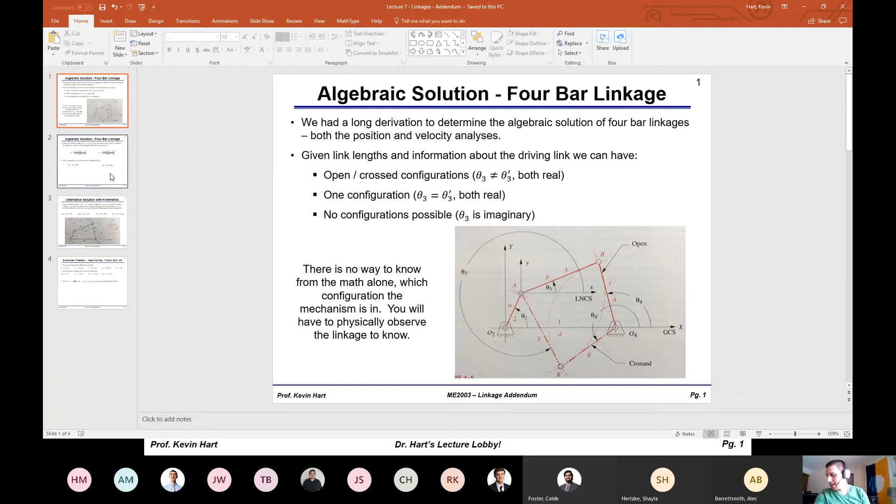Now, we looked at the algebraic solution, which we sort of went through and glossed over, and said that in the algebraic solution you could just come up with these expressions that are general for omega-3 and omega-4. Sorry guys, my dog is all up in my grill right now.

I think he just wants to go outside. It's beautiful out there. All right, so omega-3 and omega-4, there are your equations for them, and then you can get the velocities using this kinematic analysis.

Let's say you don't remember what those equations are. I don't have that memorized, I don't know what that is. Is it sine theta 4 minus theta 2, or theta 2 minus? I don't remember, okay?

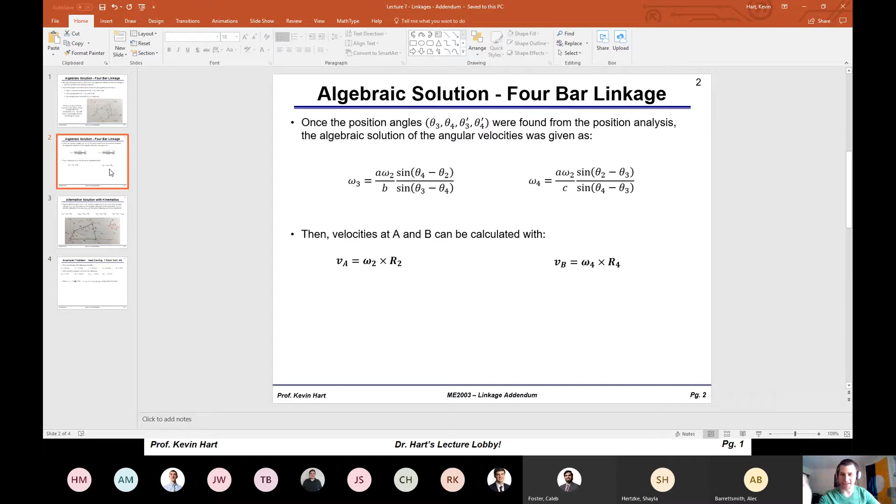Alternatively, you can just go back to your kinematics, which we talked about in weeks 2 and 3, to do an analysis on these linkages. In my opinion, it's probably easier that way, it's a little easier to understand, and it's more XY coordinate system friendly, so on and so forth.

So that's what we're going to do today. Remember, we have these general relationships between velocities of these particular pins in the system, angular velocities of the individual links, and then the position vectors that locate all of those pins. These 4 equations are all you really need to do the kinematics analysis of the linkage.

That is the velocity kinematics analysis. So VA, velocity of B with respect to A, velocity of B, and this relative velocity relationship, which you should have learned in 2002, hopefully it's stuck in your brain, is that the velocity of B is velocity of A plus velocity of B relative to A.

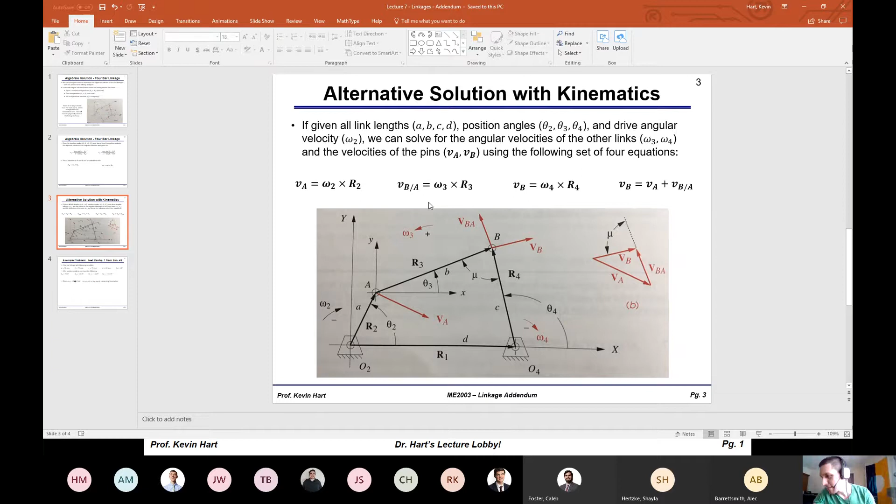All right, let's do a practice problem using kinematic analysis of one of the test configurations from simulation number 3, so that we have some verifiable numbers. Test configuration number 1 of simulation number 3 had these particular values, and we're going to go through the kinematic solution with these values just to hammer home that kinematics knowledge that should be buried in that brain.

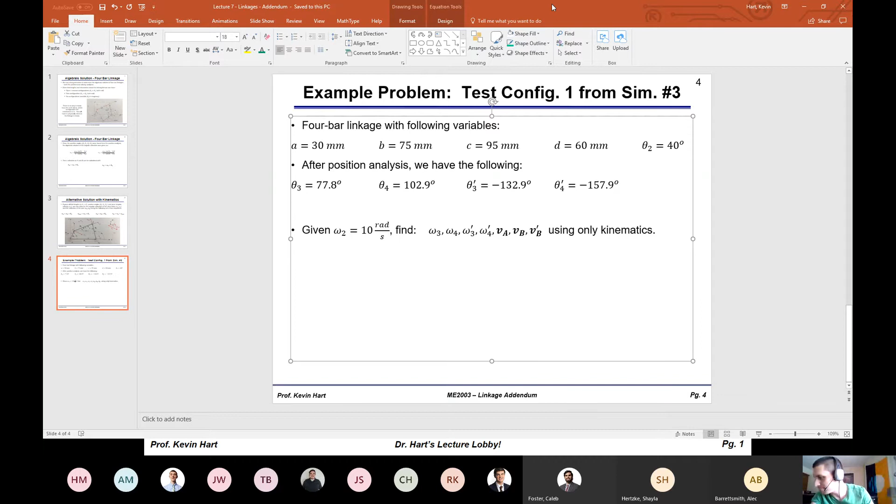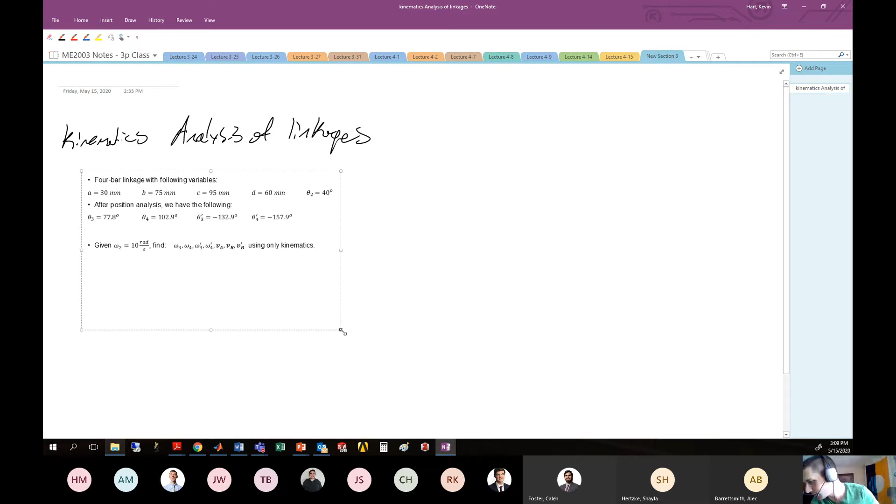So I'm going to copy this information over to the writing pad, and I'm going to bring the model in, and we're going to do it. Here's your information. And let's look at your model, which will be helpful for us in this problem.

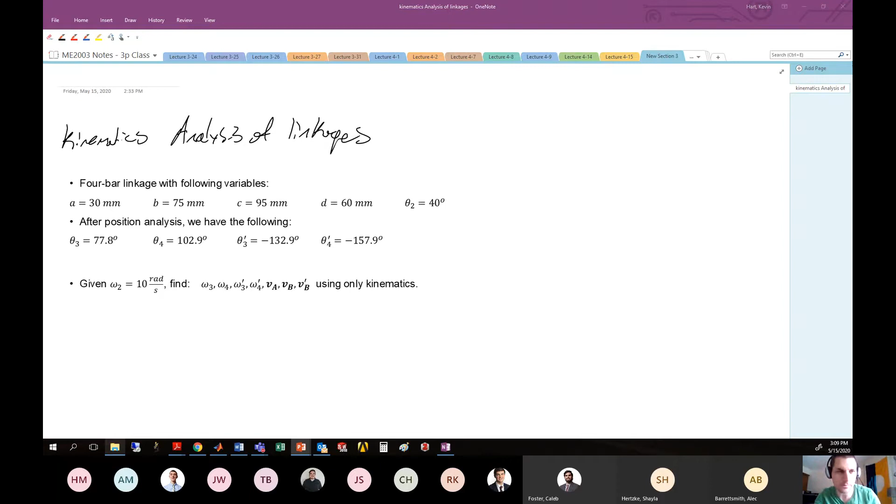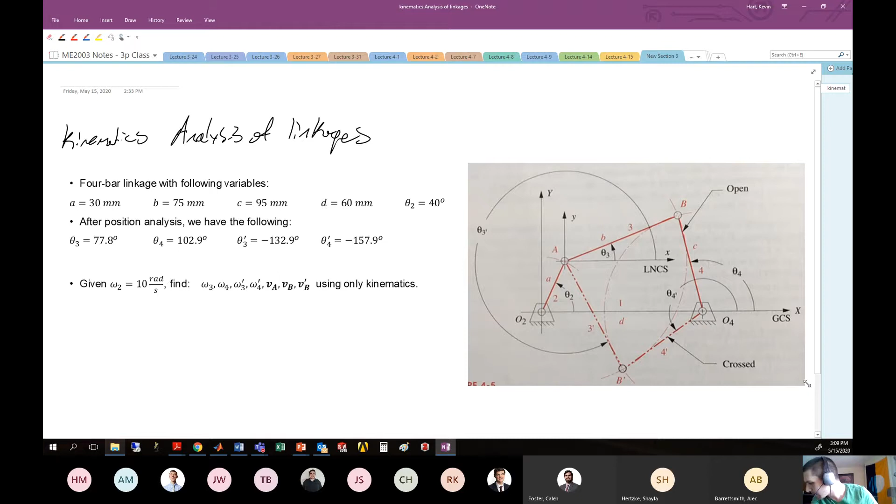I've gotten really good at this touchpad on my laptop. Usually I use a mouse when I'm in the office, I don't get a lot of practice with the touchpad, but I'm getting better with it. A little bit annoying to get used to at first, but I'm kind of getting there, forcing myself to learn. Even at the ripe old age of 31 years old, you still learn new things.

All right, so away we go. Got a 4-bar linkage with the following variables: A, B, C, D, and our drive angle theta 2. These are all things that we know: link length A, link length B, link length C, and the length between the pin positions, the value D. We also know the drive angle theta 2 is 40 degrees.

That's here. After position analysis, you have an open and a cross configuration. So we're going to assume that we've calculated theta 3 and theta 4 for both the open and cross configuration. And now we're going to do kinematics analysis to determine the velocities of the various points and the angular velocities of the various links.

All right, so using only kinematics, we're going to use the equations that follow: VA is omega 2 cross R2.

VB is omega 4 cross R4. These are easy to see because A and B can be found from the pins O2 and O4. So here's O2 and O4. We know that we can get the velocity of A and the velocity of B by something like R cross omega 2 for this particular link, and R cross omega 4, or omega 4 cross R for that particular link.

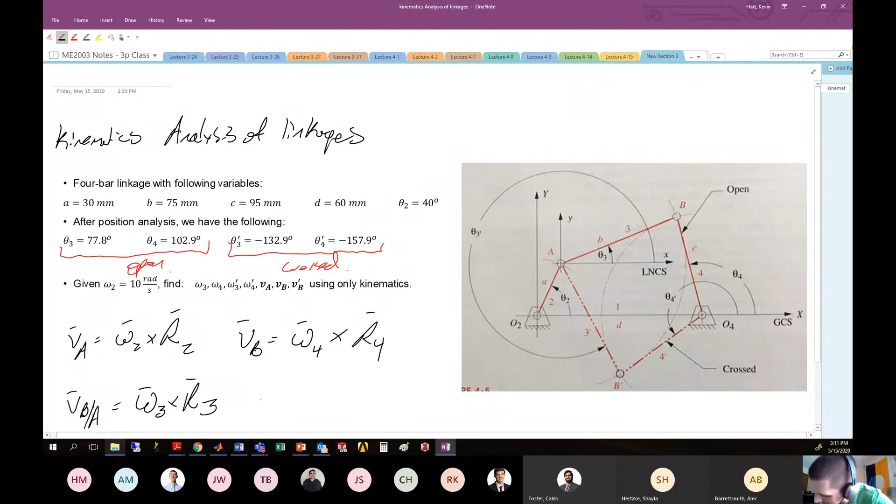We also have the idea that the velocity of B relative to A is omega 3 cross R3. That comes from this second link in the chain, where we assume A is pinned and determine the relative velocity of B relative to A. This is like if A was fixed, what is the fixed axis rotation of B about A? And then the last relationship is that the velocity of B is also a combination of the translational velocity of A plus the fixed axis rotation of B about A.

All going back to week number 2, all right? Actually, week number 1, we had fixed axis rotation equations. So this class is coming full circle, right? Quite appropriate for fixed axis rotation that it's coming full circle. Yeah, okay. It's circular rotation, get it? Yeah, okay. Oh man, quarantine, it's rotted my brain.

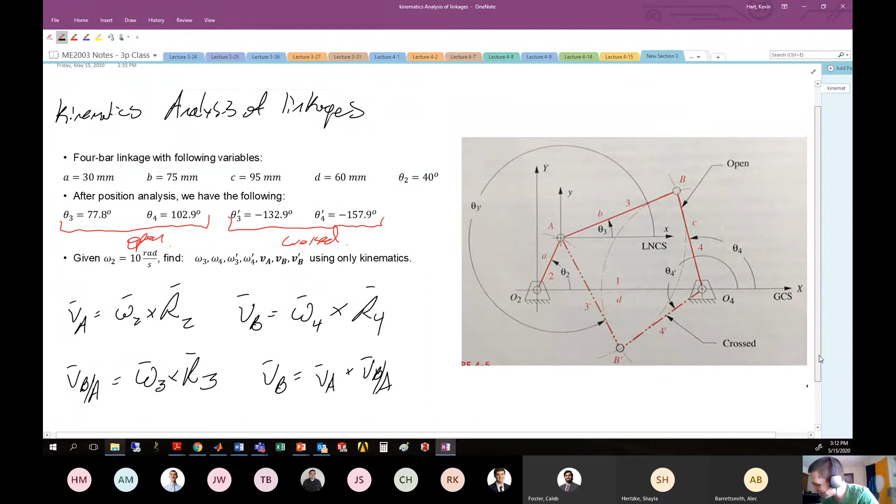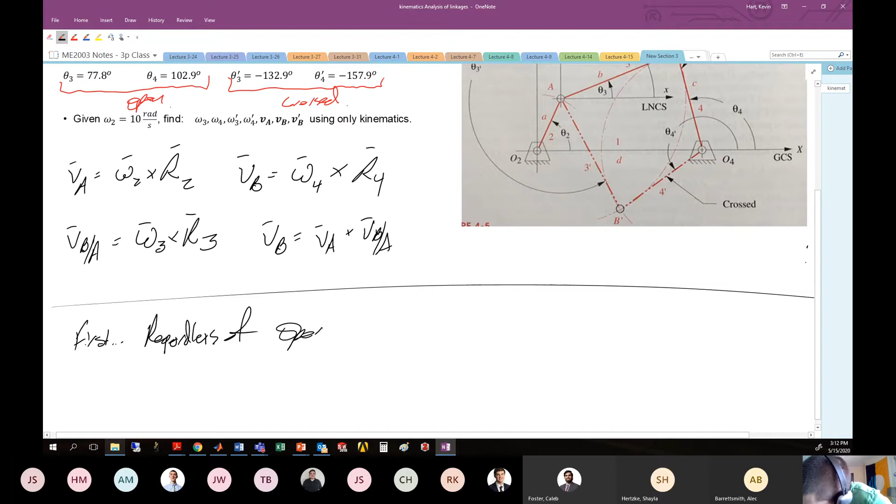Let's do it. Here we go with our kinematics analysis. First, regardless of open or crossed, the velocity at A is the same. That's because this particular link doesn't have alternate values. Theta 2, the driving angle, is whatever it is. There's no open or crossed theta 2 value, it's all just one thing. So with that statement in mind, we will say then that the velocity of A...

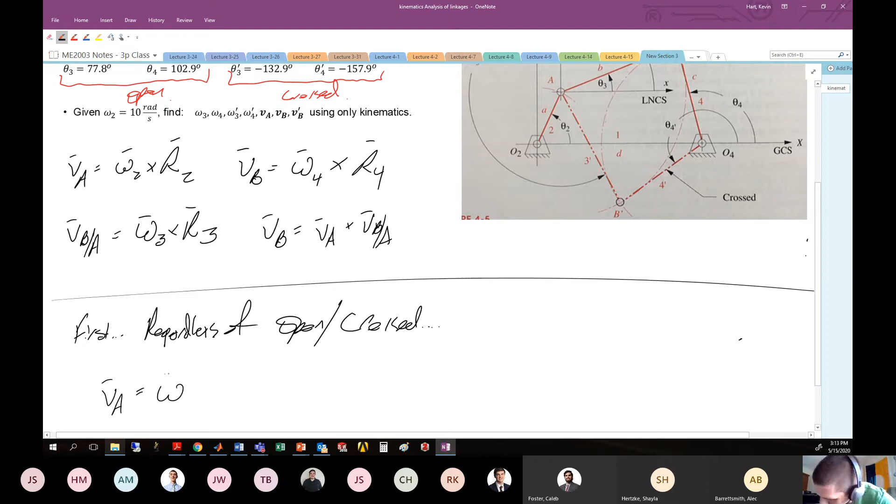is omega 2 cross R2. Omega 2 is given up above in the problem statement, 10 radians per second. It is the angular velocity of the driving link. So here's 10 k hat radians per second, and I'm going to cross that with this position vector R2. So for R2, that's this particular link in the chain. So we'll need little a and the drive angle theta 2.

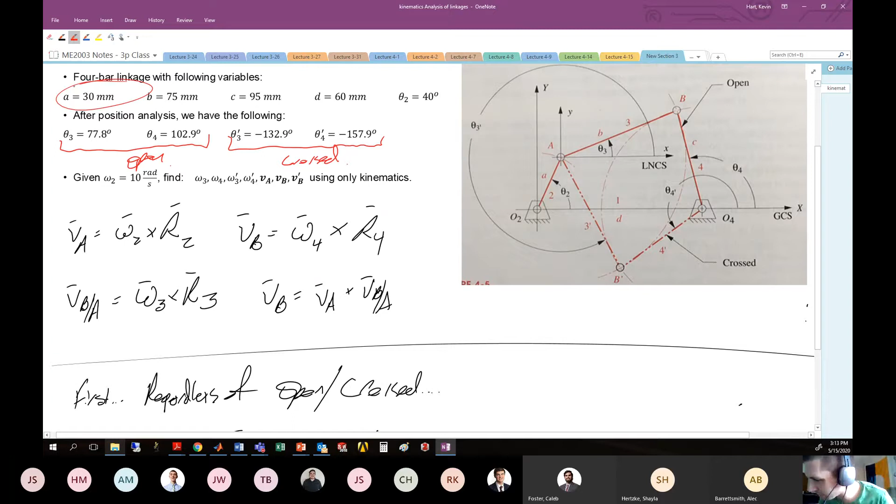So little a, 30 millimeters, drive angle theta 2 is 40 degrees. So this can allow us to define our position vector R2, which is something like 30 millimeters times the unit vector that defines that particular direction, which is cosine 40 I hat plus sine 40 j hat. Capiche?

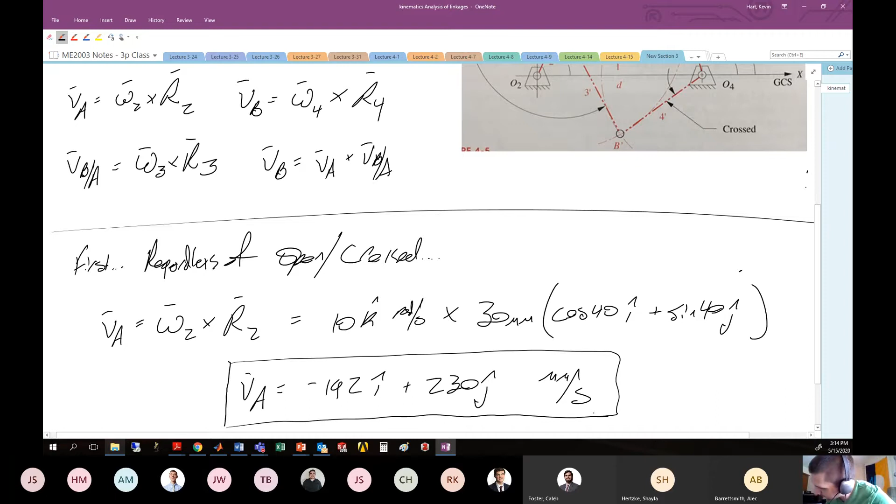Run this down, you'll find that the velocity of A, after doing your cross product, is negative 192 I hat plus 230 j hat millimeters per second. So this is the velocity of pin A in your typical XY coordinate system.

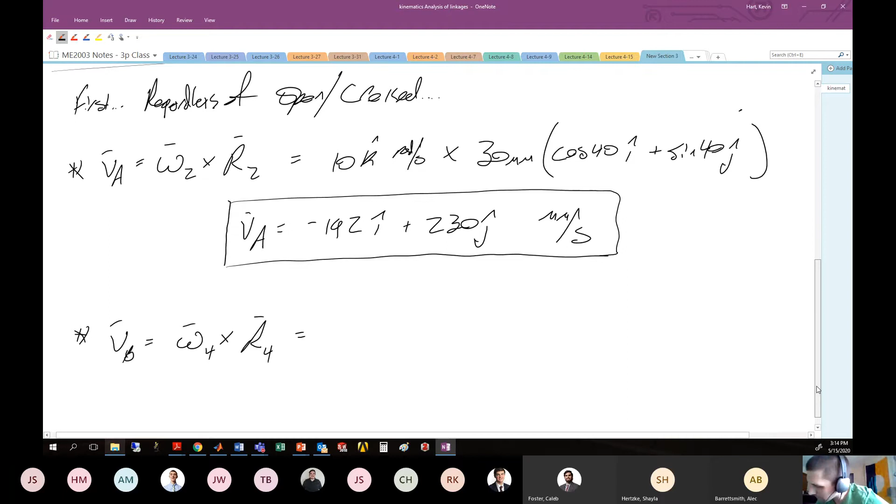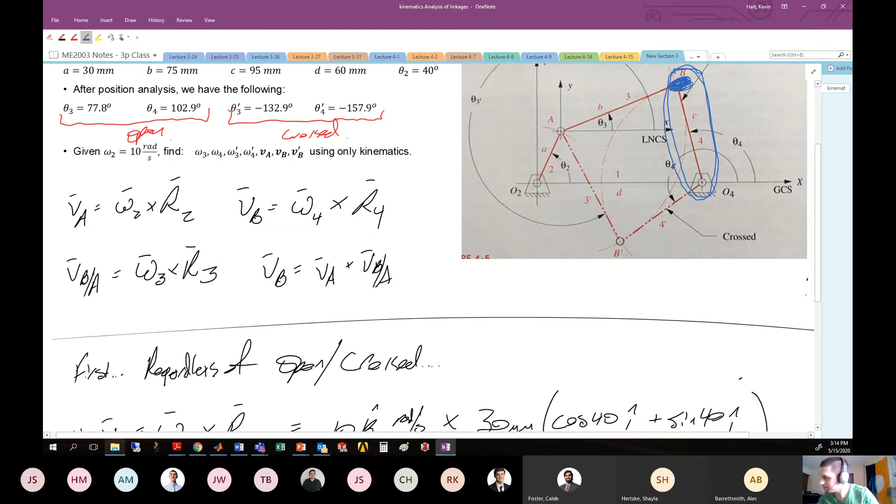Moving on, this is the first of our 4 equations that we're working with. The second of our 4 equations, the velocity of B is equal to omega 4 cross position vector for the third link in the chain, which is given by R4. Well, here we're looking at what would be this guy. We're pinned about point 4. So if I want the velocity of this point here at B, then I can just do omega cross R around that pinned location, which is exactly this arrangement.

The problem is, I do not know what omega 4 is. It's something that I'm hoping to solve for with this kinematics analysis. So I will leave that as an unknown, and I know that it's rotating in the z direction, or k hat. I'm going to cross that with position vector 4, which will have to make a selection for the open or cross configurations now, because that position vector is different in the open and cross configuration. As you can obviously see in this image, we have 2 different position vectors that we could use for R4. Let's focus on the open configuration first.

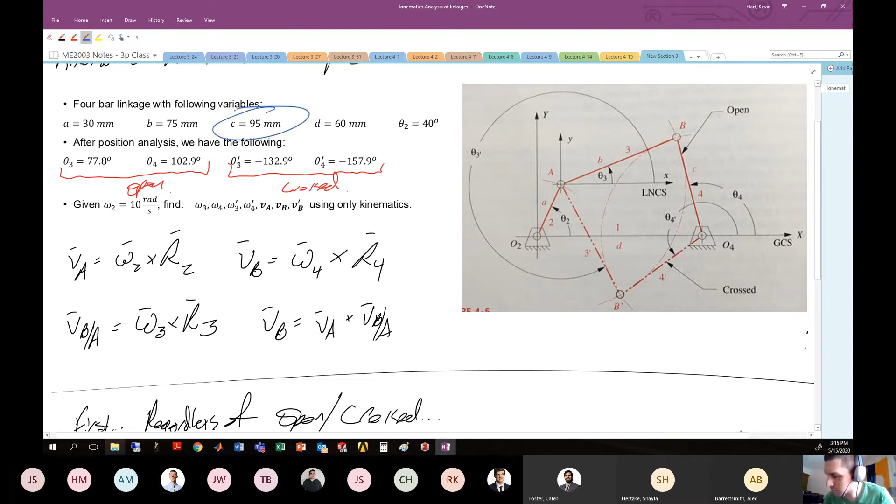Know that if you wanted to do analysis of the cross configuration, you could just put in alternate values for, let's say, theta 3 and theta 4. All right, so we're going to focus on the open configuration. That means we're going to pull this number for R4, that is 102.9 degrees. And R4 also uses the variable little c, which means we're going to pull this value of 95 millimeters. So in that particular situation, if we want to define R4, it's going to be something like 95 millimeters times the unit vector upon which it lies, which is cosine 102.9 I hat plus sine 102.9 j hat.

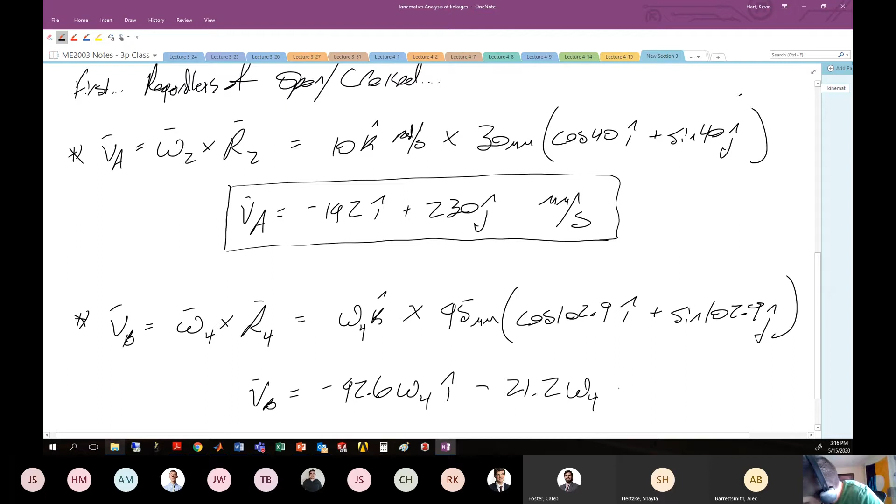So finally, my expression for the velocity of B, which will contain the unknown omega 4, after doing my cross product, is negative 92.6 omega 4 I hat minus 21.2 omega 4 j hat. Let's call this equation number 1, because we're going to have to come back to that since we've got an unknown omega 4 floating there. All right, so far we've used 2 of our 4 equations for kinematic analysis. Let's move on.

The next equation we want for our kinematic analysis is the velocity of B relative to A, which is dependent on link number 3. Here's omega 3 cross position vector R3. Omega 3 again is unknown.

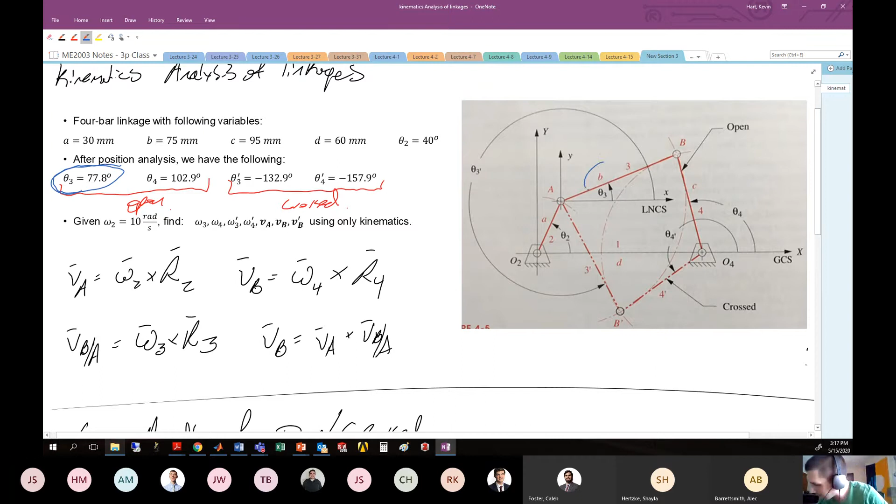I'm going to focus on the open configuration, and we'll come back to the cross configuration later. For defining R3, I need theta 3, which is this angle here, and the value of little b, given in the problem as 75 millimeters. So this is 75 millimeters times, the angle theta 3 is 77.8 degrees, so cosine 77.8 i hat plus sine 77.8 j hat.

This will give us the velocity of B relative to A. Again, the omega 3 is unknown. It's going to be negative 73.3 omega 3 i hat plus 15.8 omega 3 j hat. This here is equation 2.

Continuing, the last kinematic relationship we need to solve this problem is the general velocity relationship between A, B, and their relative velocities. So the velocity of B is the velocity of A plus the velocity of B relative to A. This we already solved for. This here comes from equation 2, and this guy from equation number 1.

So we execute that, and you get the velocity of B, which is on the left-hand side here: negative 92.6 omega 4 in the i hat, minus 21.2 omega 4 in the j hat. That comes from equation number 1 above.

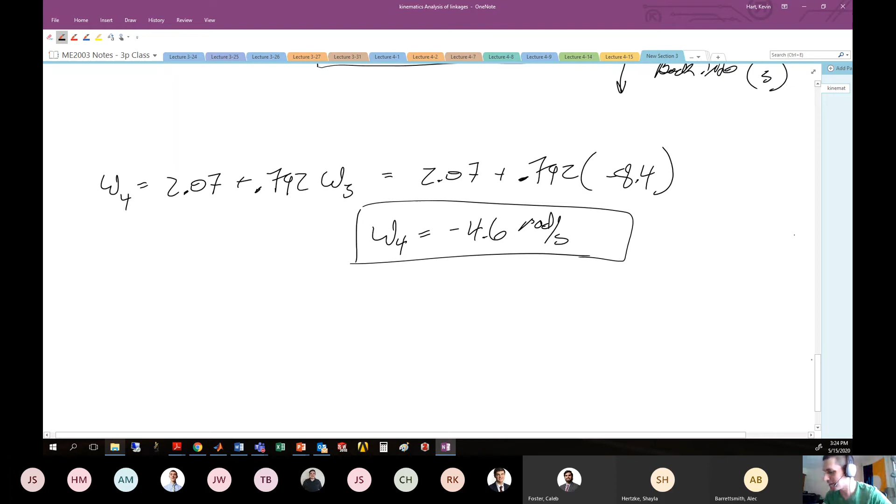So we could check this omega 3 and omega 4 using our algebraic solution. Let's check these guys with the algebraic solution.

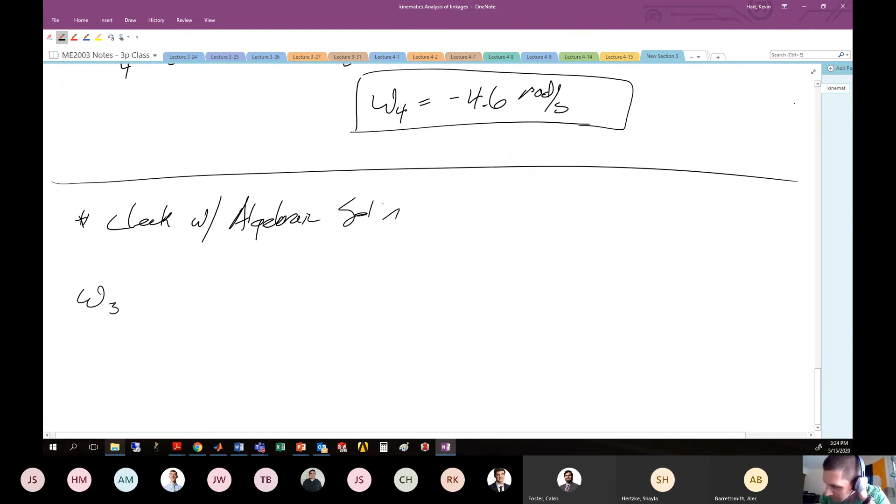All right, remember we have omega 3 equals A omega 2 on B times the fraction: sine of theta 4 minus theta 2, divided by sine of theta 3 minus theta 4.

It's hard to remember, it's hard to just memorize this because it's so similar to the equation for omega 4. So I have problems memorizing it, which translates to you guys having difficulty memorizing it too. But maybe you guys memorize stuff better than me.

I would be the worst actor in the history of Hollywood if I tried to be an actor, because my memorization skills for learning lines and lyrics of songs is horrible. I can listen to a song 100 times on repeat and not know the lyrics. Some people hear it 3 times and know every word. I'm like, how the hell do you do that? Equations I'm better with, but memorizing stuff, terrible.

All right, let's get back to it. A, given in the problem, was 30 millimeters, to remind you, times omega 2, 10 radians per second, divided by little b, given in the problem, 75 millimeters. This is multiplied by the fraction that is sine of theta 4. We're looking at the open configuration still, so 103, actually 102.9 but I rounded here, 103 minus 40. 3 significant figures, that's enough, that's all you get as an engineer. 3.14, that's all you need, right? That's all pi is. Slop off the rest, who cares?

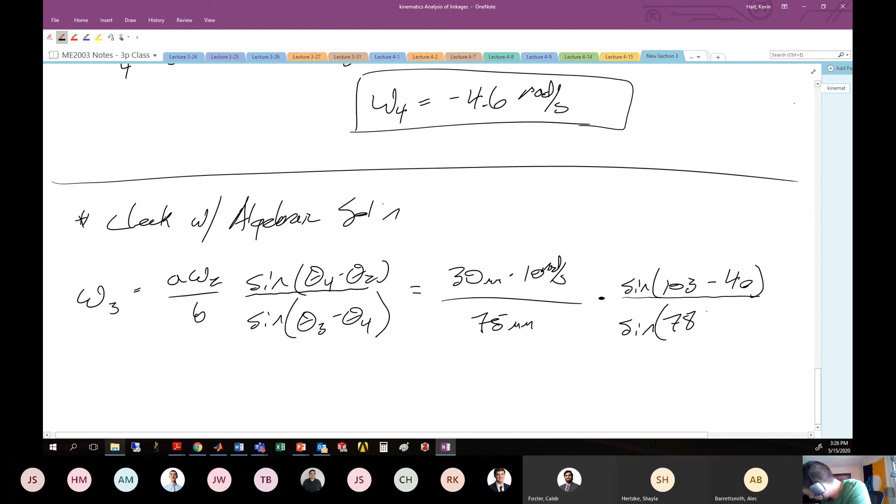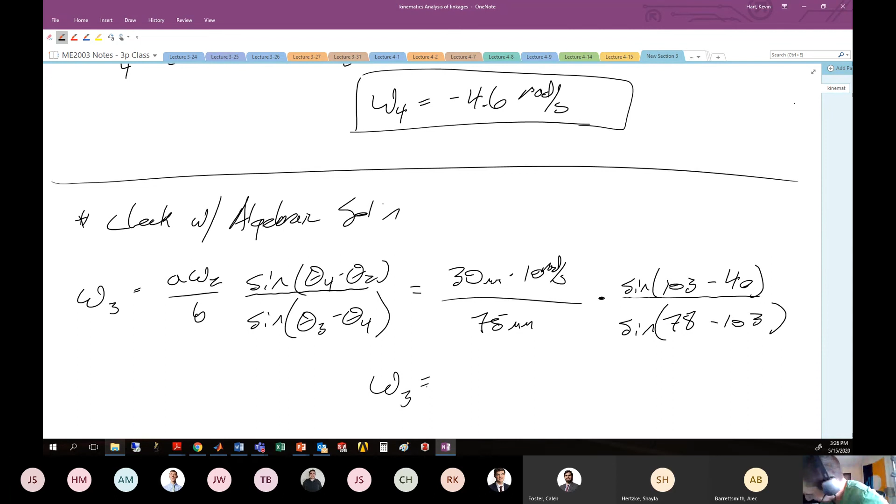Theta 3, again we're taking the open configuration, 78 minus 103. Punch these into your calculators, and you'll get omega 3, negative 8.4 radians per second. Hey, it matches. Good things.

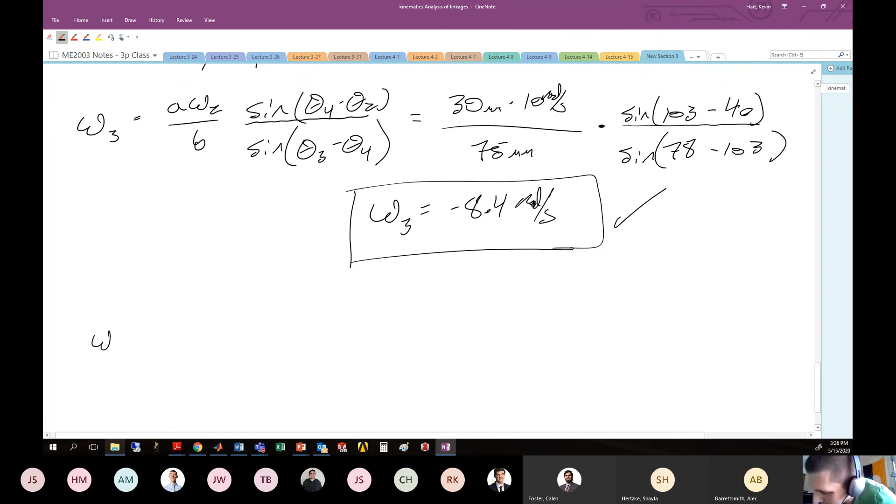You could do the same thing for omega 4, slightly different equation. Here it's really the thetas that throw me off, because the thetas for omega 3 and the thetas for omega 4 in the sine argument are not the same. So it's annoying. All right, there's your expression for omega 4.

Plug all this in. A is 30 millimeters, 10 radians per second for omega 2, little c is 95 millimeters. Here we have sine theta 2 minus theta 3, that's 40 minus 78. And in the denominator we have theta 4 minus theta 3, that's 103 minus 78.

Plug this in, beep boop beep boop, negative 4.6 rads per second. Isn't that rad?

All right, so our algebraic solution matches our kinematic solution. And that's good, because the algebraic solution is basically derived from the kinematic solution. So it better match, or else we messed up.

I really want to go through this exercise because I don't want you guys to lose the kinematics. Don't lose that power. It's like when Superman's right by the kryptonite, right? I don't want you to lose your kinematic superpower because you're near the kryptonite, which is the algebraic solution. Don't let that algebraic solution be your kryptonite, or don't let the MATLAB run button be your kryptonite.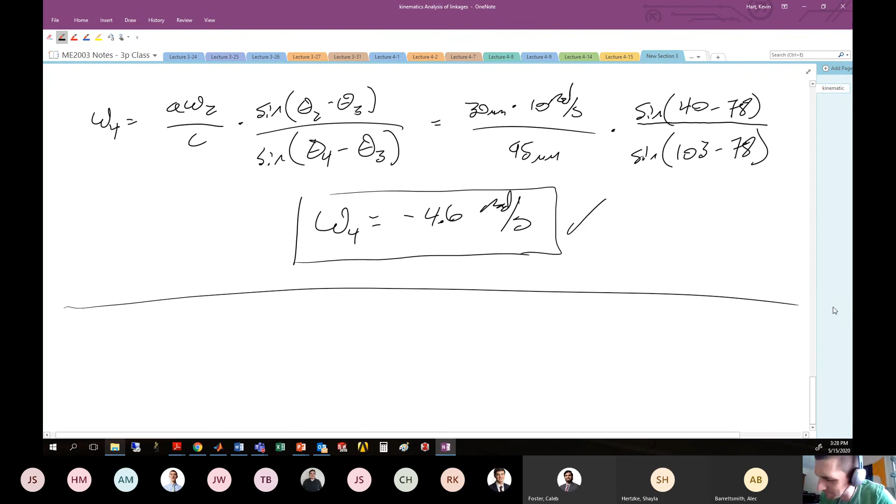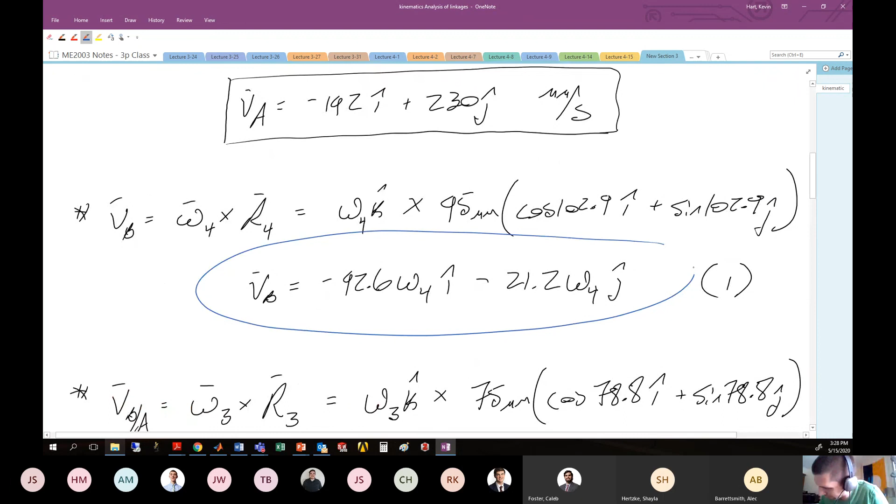All right, we already solved for the velocity of A. All that we really need to complete the problem is the velocity of B. And way back here, we had this general expression. Remember when I wrote that number 1? You're like, what a silly goose, he's never going to use that number 1. Ha-ha, I'll have to use that number 1 right now. It's like I planned that. Go back into number 1.

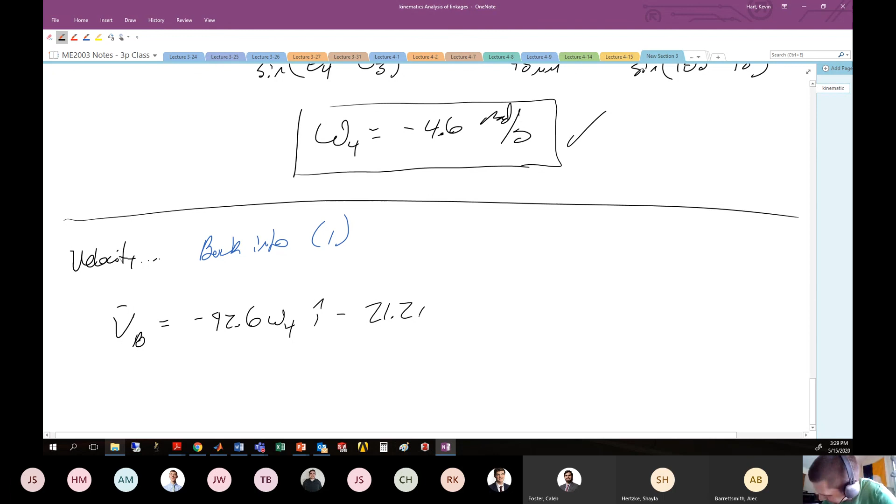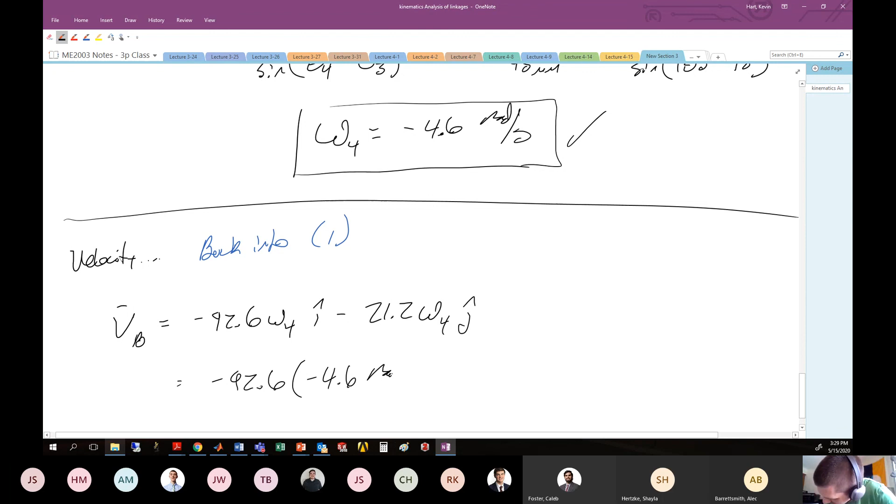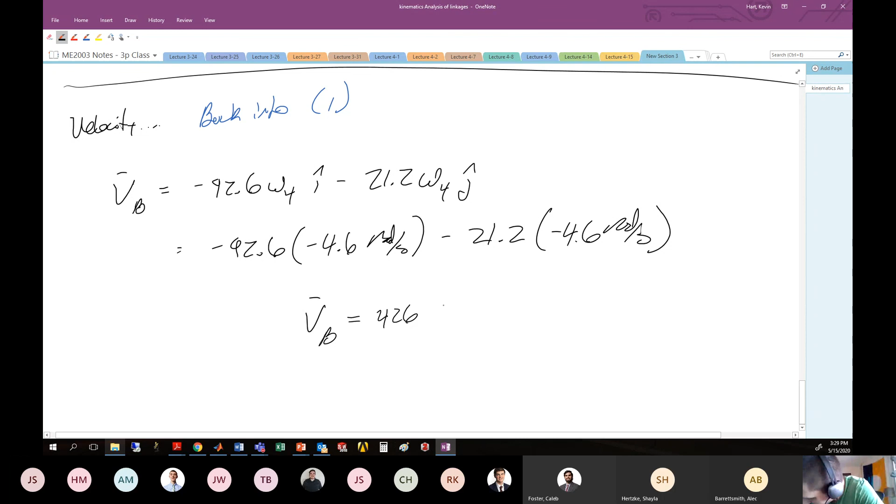You're going to end up with negative 92.6 times omega 4 i hat minus 21.2 omega 4 in j hat. So we plug in omega 4 we found, negative 4.6 radians per second, minus 21.2 times omega 4, which is negative 4.6 radians per second. Finally, velocity pin B here is going to be 426 i hat plus 98 j hat millimeters per second.

Sweet, there you go, full kinematic solution for the open configuration. You would have to go through a similar analysis for the crossed configuration if you wanted, just use the values of theta 3 prime and theta 4 prime to get you there. You'd have a different velocity at B, something like VB prime, for the crossed configuration. Cool? Understand? Rubber band?

There are some problems similar to this on the exam review, and I'd like you to give a stab at them using this kinematic solution. All right, I think it's good for you, kind of bring the class full circle.